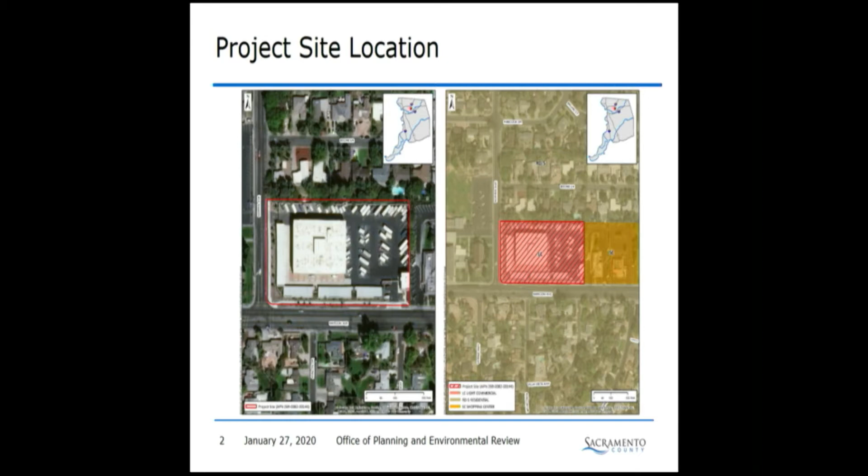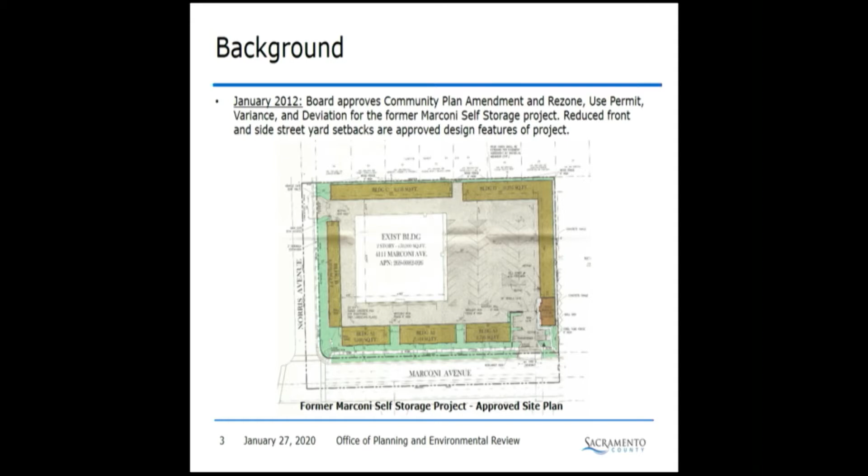These existing uses and structures on the project site were permitted with entitlements approved by the board in January of 2012 for the former Marconi self-storage project, which included a community plan amendment and rezone of the project site from business professional to light commercial, a use permit to allow a self-storage facility and RV boat storage on the project site, a variance for a reduced rear yard setback, and to eliminate required landscaping and screen trees along the northern property line adjacent to residential uses, and a deviation from fencing requirements along the northern property line. Reduced front yard and side street yard setbacks are identified as approved design features for the project.

With the exception of the 2 structures located along the northern and eastern perimeter of the project site, labeled buildings C and D in the depicted site plan, project structures and site improvements were constructed and the facility was operational by 2013. Although the deviation from the fencing requirement along the northern property line was granted, that wall was eventually constructed. It's an 8-foot tall wall, and the reason it was constructed was because those structures in those areas were never constructed, so the wall was put in instead.

The applicant has indicated that there is additional demand for enclosed storage space at this business location, and to that end, the applicant proposes to remove the outdoor storage of boats and RVs from the site in order to expand mini storage use. As such, the following entitlements are being requested: a use permit to allow the expansion of mini storage by way of 4 new structures, adding approximately 33,000 square feet of additional area, and the removal of outdoor boats and RV storage from the site, a special development permit.

A special development permit to allow for a reduction in required vehicular and bicycle parking spaces, and design review to comply with the countywide design guidelines.

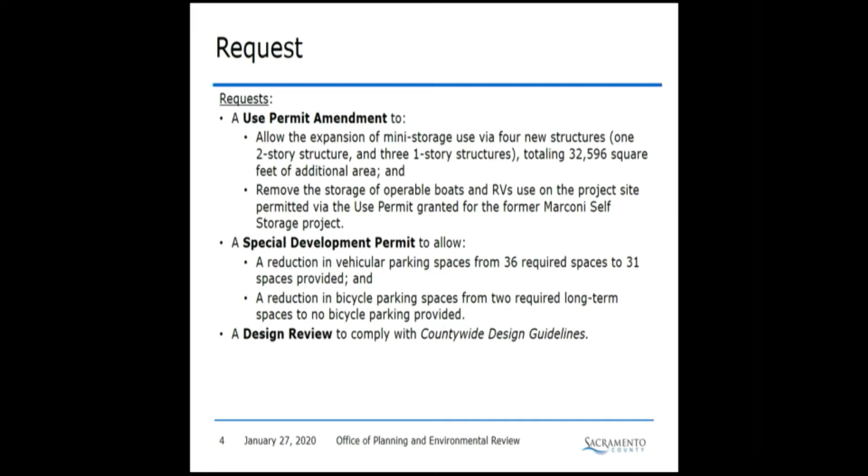The removal of areas currently used as boat and RV storage would allow for 3 new one-story structures, approximately 10 feet tall, located along the northern and eastern perimeters of the project site, as well as a new 2-story structure, approximately 22 feet tall, located in the eastern portion of the site.

The 1-story structures are the typical roll-up storage units, and the 2-story structures have primary points of access to access the storage units inside the building.

A total of 31 parking spaces would be provided in the vicinity of the 2-story structures and the primary driveway from Marconi Avenue. Our zoning code doesn't specifically identify parking requirements associated with this use. As such, the parking ratio of 1 space for every 2,000 square feet for warehousing uses is applied, which is the most similar type of use to mini storage.

Staff applied this required parking ratio to the square footage of only the 2-story structures, as it is anticipated that patrons of the 1-story roll-up structures would not be utilizing marked parking spaces and would drive up to load and unload their stuff.

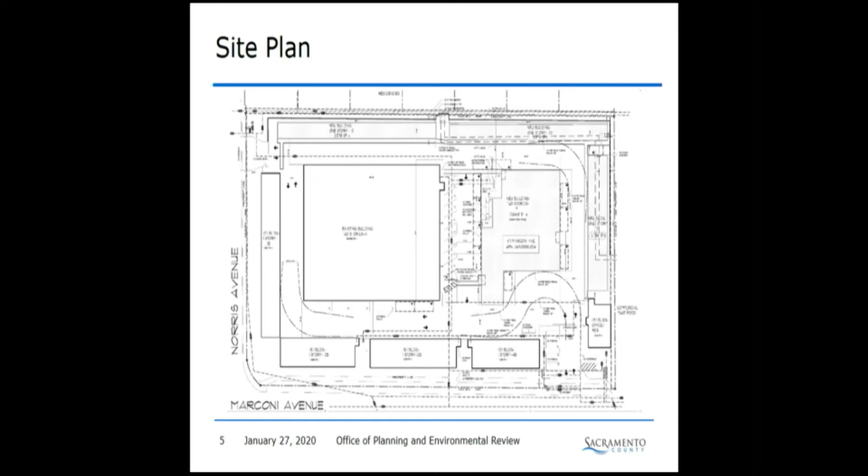With this application, 36 vehicular parking spaces are required for the project, and a reduction of 5 parking spaces is what is being requested in the special development permit. No changes are proposed to the existing structures, walls, fencing, driveways, landscaping, or signage on the subject parcel.

The proposed structures are designed to match and complement the existing structures on site through use of similar color and accents. The new 1-story structures would be painted beige.

Views of these structures would generally be screened by existing on-site structures, as well as the wall and fencing along the project site perimeter. The new 2-story structure would also be painted beige and include brick siding and beige aluminum canopies to match the existing 2-story structures and the office and manager's residence.

This structure would be visible from Marconi and from existing commercial uses and residential uses to the north and east.

The Design Review Committee, when reviewing this project, suggested that the brick siding on the south elevation of the 2-story structure wrap around the southeast and southwest corners to better facilitate cohesiveness with the existing structures on site, and this suggestion has been incorporated into the west and east elevations of the 2-story structure.

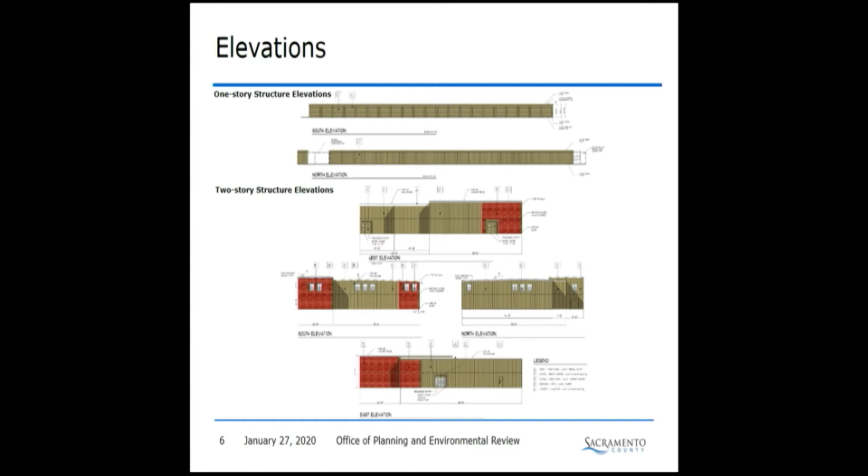The final hearing body for this project is the Planning Commission.

Substantive public comments received on this project include 1 inquiry from a neighbor that resides in a residence abutting the project site to the north. He asked for clarification regarding the height of the existing wall and the proposed 1-story structures, but no specific comments were made pertaining to this project.

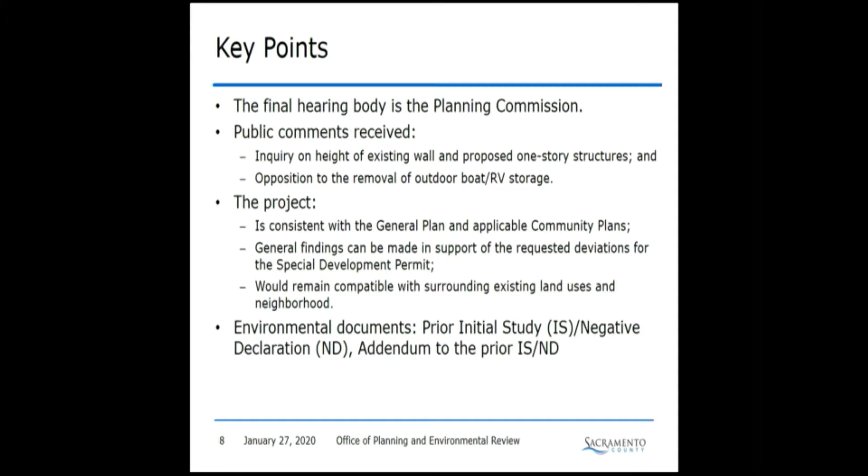2 other members of the public expressed opposition to the project due to the request to remove outdoor boat and RV storage uses from the site. These commenters currently store their vehicles on site and express that eliminating this use from the site would require them to park their vehicles on public streets, which would potentially increase vandalism, theft, and blight in their neighborhood.

Staff received a call this morning from a person who is unable to attend this meeting but wanted staff to reiterate her concerns regarding the unintended consequences of removing outdoor boat storage from the site and how this will drive prices to increase due to the reduction in competition.

The project is consistent with the general plan and applicable community plans. General findings can be made in support of the requested deviation. This site has been used for this use since 2013, and the project improvements would remain compatible with the surrounding existing land uses.

The environmental coordinator determined that the prior environmental document prepared for the former Marconi self-storage project remains applicable to the current project proposal and identified no potential significant impacts as a result of the project. There are no mitigation measures, and an addendum was prepared to the prior IS/ND.

Both DRAC and the CPAC recommended approval of the project, and so staff is also recommending approval of the project and that the Planning Commission take the following actions.

Staff is happy to answer any questions, and the applicant team is also available for questions.

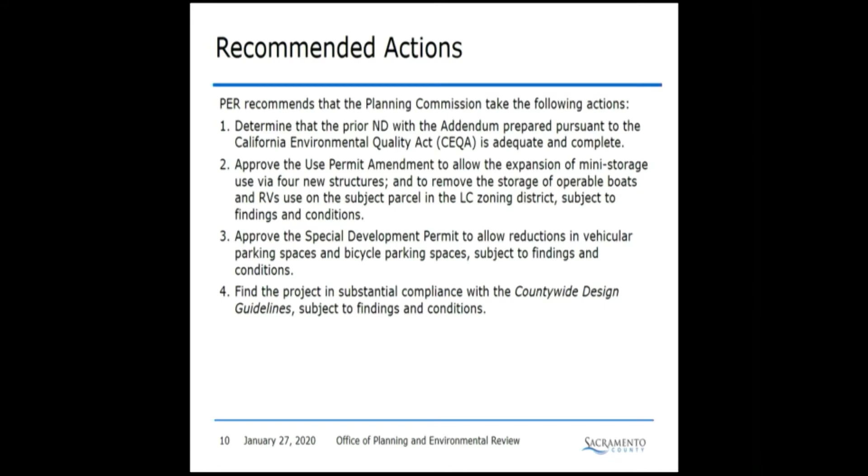Great, thank you. Any questions of staff? Just one. Good evening, Jesse.

Just one question. Hours of operation? Those are in the prior use permit. Can I just grab it so I can tell you? Yeah, that's great. I'm just curious what it was. I didn't notice it.

So it does say 7 a.m. to 9 p.m. Okay, that's good, Chris. Thank you, that's good.

Thanks, Jesse. Any other questions, staff? Okay, thank you. We'll bring the applicant up.

Good evening, Norm Kotash, and yes, I've been sworn in. And you're in agreement with all of the conditions? I am, we are. Any questions of the applicant? Okay, thanks so much, thanks for your time.

Appreciate it. I do not see any public comment. Anybody wishing to speak on this item?

Okay, Madam Chair, I did think of a question for staff. Sure, go ahead. Just real quickly, do I understand that even if the applicant had not requested this change, they could choose not to provide boat or RV parking, that there's no condition that requires them to continue doing that, right? So the zoning code in effect at the time when the prior use permit was granted required a use permit

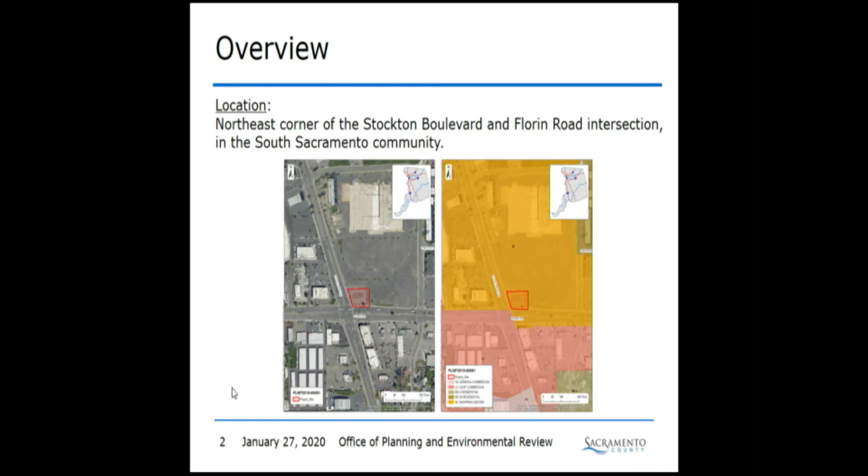So the request before you today is for a use permit, special development permit, and design review. The use permit entitlement is to allow a 24-hour automobile service station and a 24-hour convenience store within the shopping center zone, as well as a taller fuel station roof structure above the design clearance height. The special development permit is requested to allow deviations from public street frontage, setbacks, landscaping, and signage development standards.

And as you will see in the next couple of slides, there are two versions of the site plan and the landscape plans - an interim and an ultimate plan. The interim reflects the build-out of public improvements within existing conditions, and the ultimate reflects the build-out of the entire corridor, which includes intersection widening and dedication of right-of-way.

So two of the requested landscape deviations, the 20% landscape area and the 8-foot wide landscape planter, are a direct result of the future corridor and intersection improvements. I'll go into that more in detail later on when the site plans are up on the screen. The request also includes a design review to comply with countywide design guidelines, and a letter of public convenience or necessity will be heard by the board and is part of this development proposal.

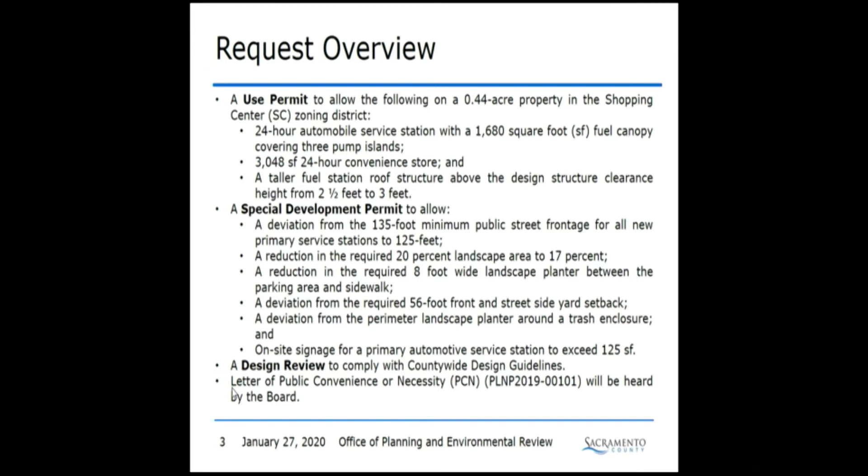So as I said, there are two versions of the site plan. The interim plan is on the left, and it reflects the build out of public improvements within the existing conditions, reconstructing the sidewalks and driveways in kind to meet ADA accessibility. The ultimate plan on the right reflects the build out of the entire corridor and intersection. Both Stockton Boulevard and Florin Road are planned to be 96-foot wide thoroughfares, and the intersection is to be widened.

Approximately 166 square feet of the subject parcel would be dedicated to the ultimate build out of the surrounding roadway network. The site plans were designed to accommodate both interim improvements and ultimate improvements.

The automobile service station is proposed to consist of a 1,680 square foot fuel canopy covering 3 pump islands, and the convenience store is proposed to be 3,048 square feet. The fuel canopy is located in the eastern portion of the subject parcel, with the convenience store in the western portion, and the drive aisle and parking area between them. There would be 2 entrances to the convenience store, one facing Stockton Boulevard and one facing the parking area.

As part of the special development permit, deviations are being requested for reduction in structure setbacks due to the size constraints of the site, and to create a more forward building presence on the intersection corridor.

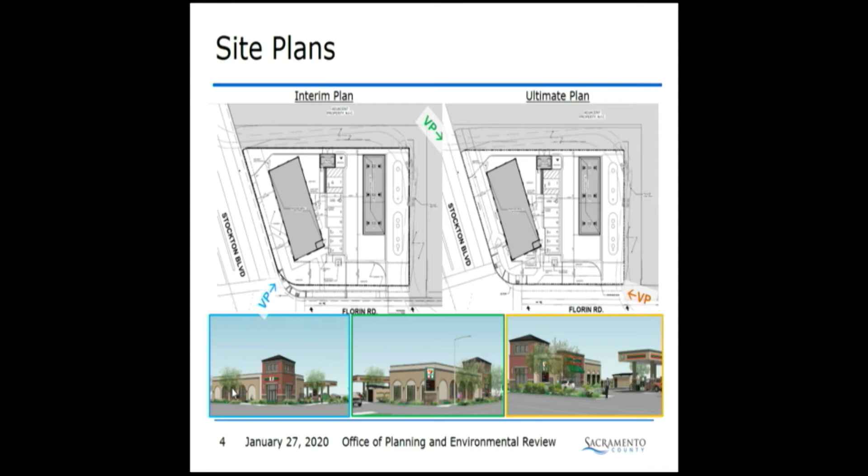Here are the 2 landscape plans. The interim plan shows approximately 75% of the subject parcel consisting of the footprints of the proposed new structures and paved areas, with 25% landscaped. This exceeds the zoning code's minimum 20% landscape area requirement.

The ultimate plan shows approximately 83% of the subject parcel consisting of impermeable surfaces, and approximately 17% landscaped. The increase in impermeable surfacing is a direct result of the ultimate build out of the Stockton Boulevard and Florin Road intersection right-of-way. So the applicant is requesting a deviation from the 20% landscape requirement.

In addition to granting the county right-of-way, a 23-foot easement for public utilities and public facilities on both Stockton Boulevard and Florin Road would be required. This creates, as you can see, an alternative pedestrian layout and landscaping within the county right-of-way.

The interim plan would consist of an attached sidewalk along the subject parcel's interface with the two roads, while the ultimate plan would feature a separated sidewalk with landscaping on either side. The ultimate plan also includes more trees along the subject parcel. No trees along the roadway were included in the interim plan because that area will change in the future.

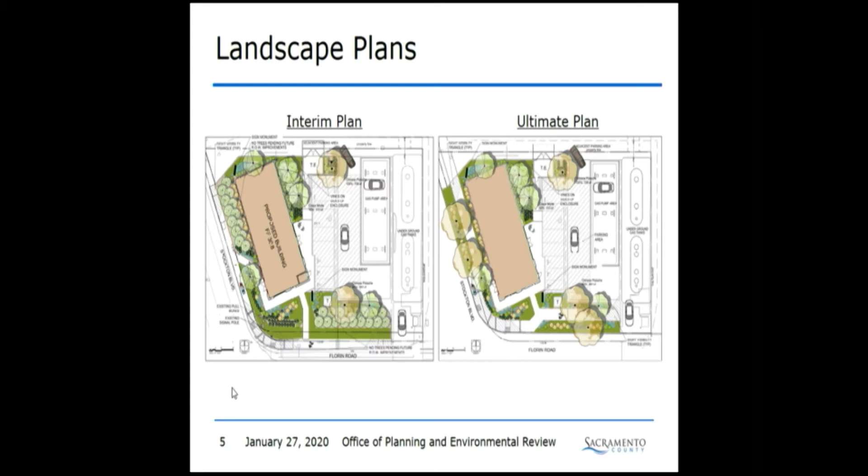In order to capture the orderly development of both of these plans, conditions of approval were crafted to ensure that final development plans are in substantial compliance with the approved exhibits at the time of project development and at the time of the intersection widening and full corridor build-out. That's conditions of approval 3 and 10.

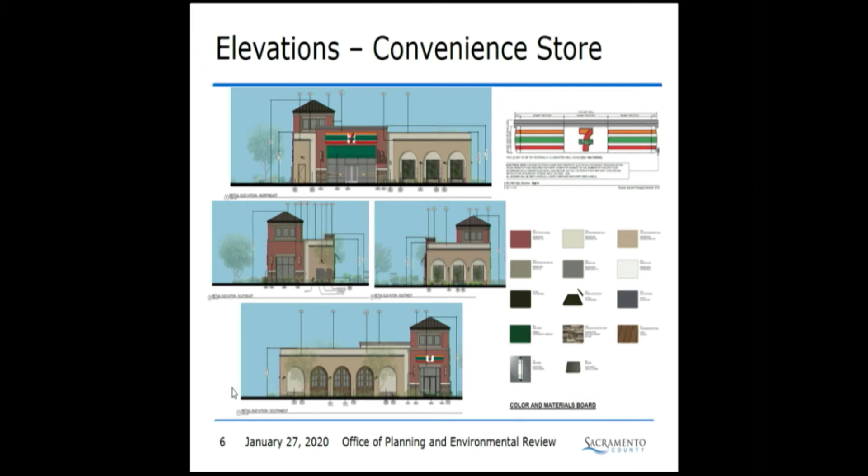All proposed structures on the subject parcel would utilize a color palette consisting of dark and light beiges with red and gray accents. A stone base would be featured on the red accent portions of the building, and architectural archways would be featured along 3 of the elevations, containing either windows with wood paneling or some climbing vegetation.

Signage on the subject parcel consists of wall signs on new structures, 2 monument signs, and corporate logos and advertising on the fuel dispensers on the pump island area. The applicant is requesting a deviation from the 125 square foot maximum sign area standard to accommodate the logos on the fuel dispensers. The monument signs and fuel canopy would contain the same stone base as the convenience store for aesthetic consistency, and the trash enclosure would be painted and architecturally similar to the main building.

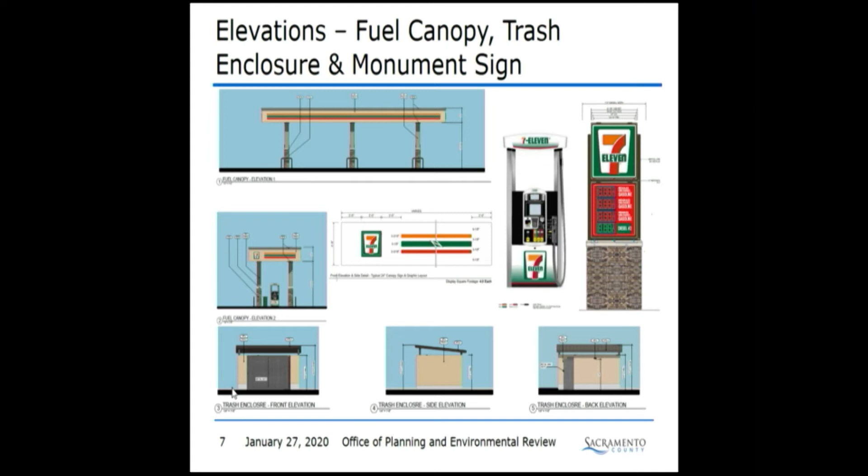An initial study and negative declaration was prepared pursuant to the California Environmental Quality Act. It was released for public review on September 27th of last year, and the public review comment period closed on October 27th, with no comments received during that period. The initial study and negative declaration concluded the project would have no impact or less than significant impacts to environmental resource topics. However, impacts regarding hazards and hazardous materials, cultural resources, and air quality and greenhouse gas emissions were discussed, with mitigation measures to enforce mitigation implementation, notification, and verification of all actions.

The South Sacramento CPAC, the Community Planning Advisory Council, met on September 18th of last year to hear and consider the project, as well as review and comment on the general plan amendment to the environmental justice element. Seven members of the public spoke on the proposed project; five were members of the county's Environmental Justice Advisory Committee and other community-based organizations, and they were all in opposition. Reasons for opposition included overconcentration of convenience stores in the area, air quality impacts from gas stations, lack of healthy food options, traffic safety and impacts, proposed on-site security, and potential crime.

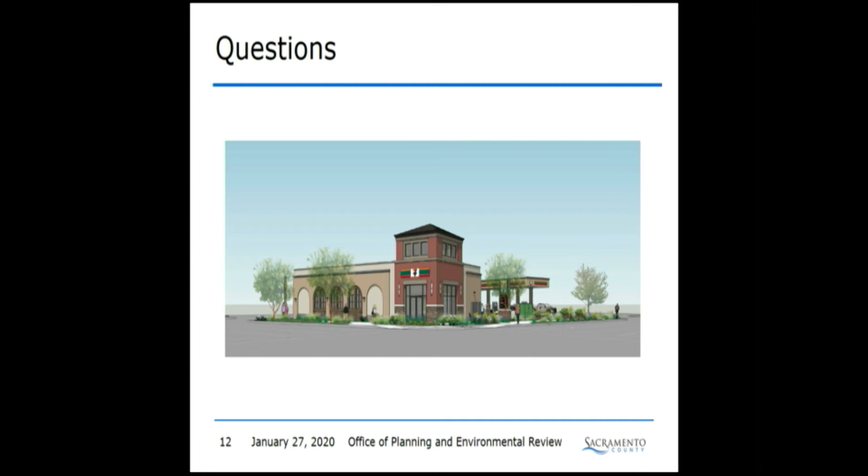Good evening, Kimber. A couple of questions for you regarding site access. Did the applicant give you a diagram depicting how the fuel truck is going to be completely encapsulated on site without parking in the easement? No, but I believe they brought some here today.

I'm not sure what condition the easement is in. Is there any requirement on improving the easement so it's not full of potholes or items like that? That's completely within the easement agreement itself, so it would be a civil matter between the two parties on who maintains it.

It's a very old easement, so it's hard to read, but I think it was included in the current... We'll have an opportunity for the applicant to speak, so we'll get to you in just a second. It doesn't state who would be maintaining it. It just says it is an ingress and egress easement of persons and motor vehicles over and across that certain parcel of real property described as follows. So there isn't specific language on who would be maintaining it.

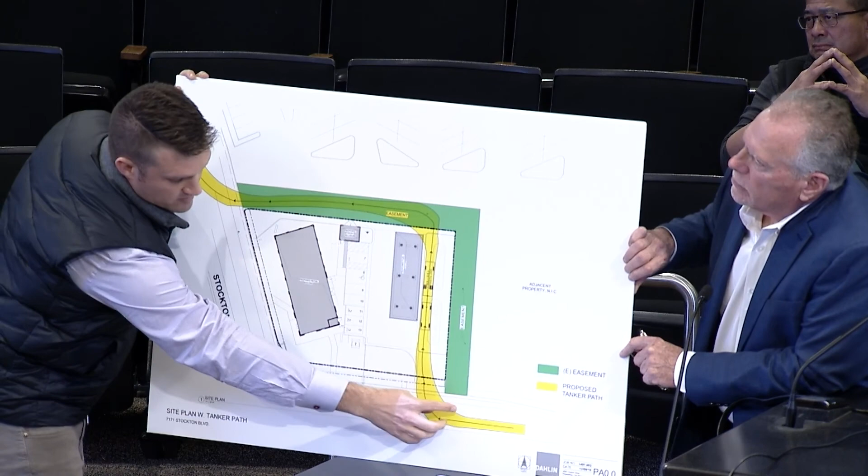We get closure, so we have a full, complete parcel. If there was a gap or something like that, it wouldn't close - you'd have two separate parcels instead of one, if that makes sense. One developable area, but we would not be proposing to park anything in the easement. It would turn in, come here to fuel, turn out. This is inside, and here's the tanker, how it would work. So the offloading of the fuel products will take place on the actual property, not in the easement. The easement is just access.

Then let me ask a question relative to the graphic you're presenting. During business hours, the fuel truck comes in, parks as you depicted. Now doesn't that render your fuel island somewhat inoperable during that time period? No, I would say one side would probably be blocked. You're 100% right, but I think they can still get in and out, if that makes sense, so they can get around. But I think operations from 7-Eleven can speak a little more to the timing of fueling, when it comes, how long it takes.

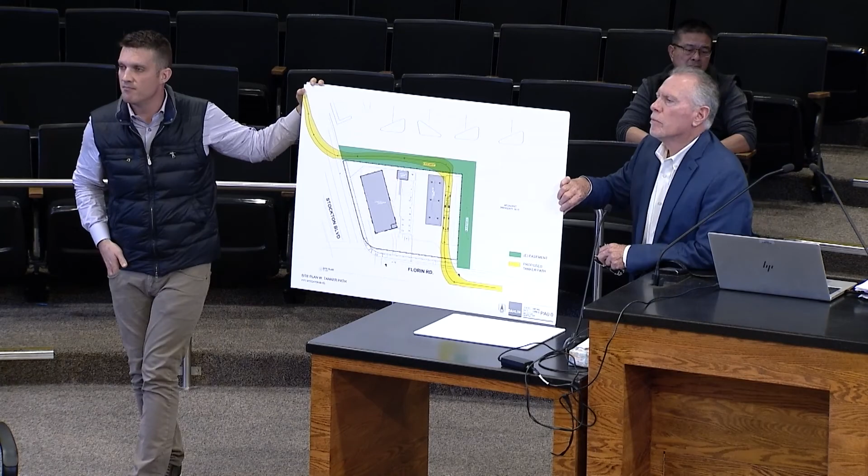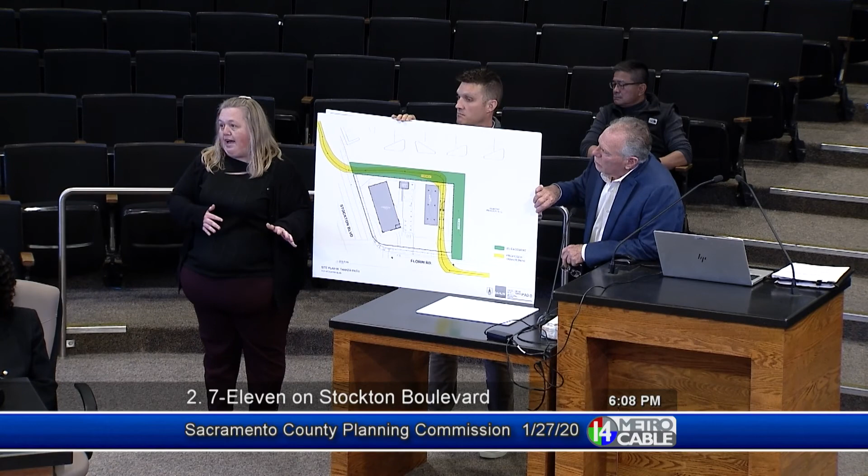Crystal Justice, 7-Eleven. So we go through and create all of these drawings and have them approved through our fueling department. We own the actual company that delivers the fuel, so they have to follow these drawings. A lot of times there's no other way they can get in and out of our property line, so we have the same drivers that do these routes every week in and out.

So as you can see, they would come in and move around. The approximate time they're in our property line is about 20 minutes, give or take. It may be a little longer if they have to wait for a car to move, since they're not going to block a car if something's parked there. But they're very efficient at getting in and out and dropping that fuel.

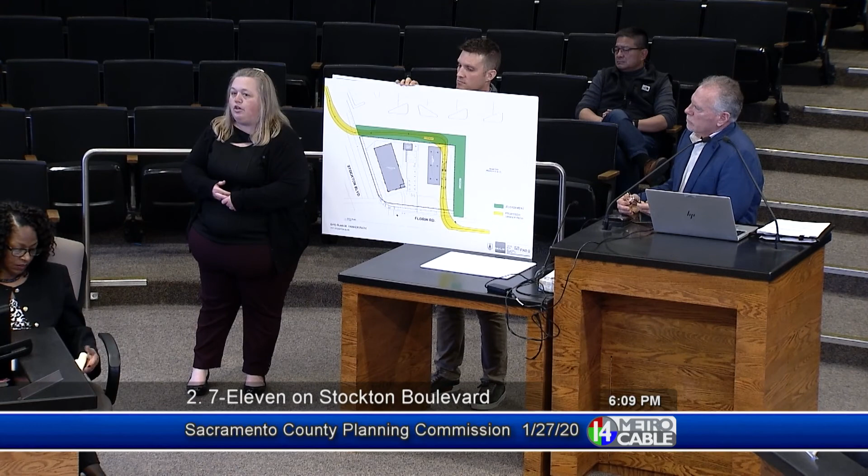What time of day do they normally arrive? We arrange it typically 7 a.m. to 6 p.m., but we can move that around and make recommendations based upon travel patterns and busy times of day. In a more urban area, we try not to do that during rush hour traffic. Our transportation department has traffic studies they look at for those types of things too.

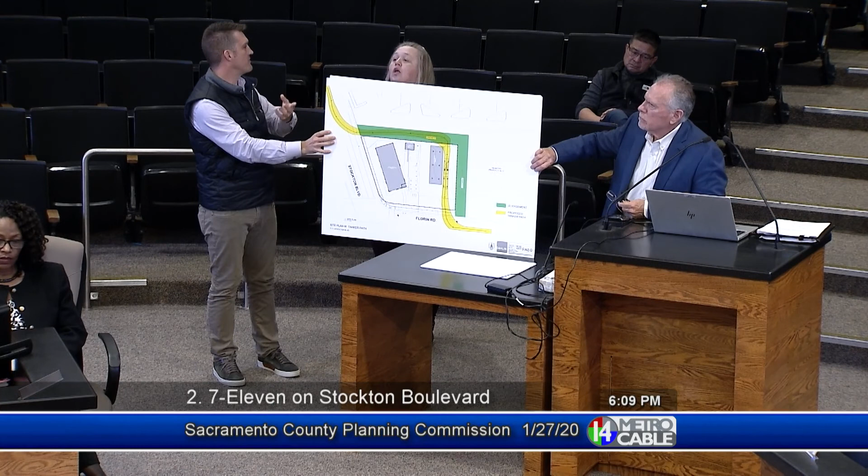If I'm understanding correctly, what we're saying is that there's no way to physically prevent them from ever parking in the easement, but they have protocols in place that say this is your truck path, this is how you fuel. It sounds like those protocols and that path are a big part of the job of driving the trucks. Yes, so I think they're doing everything they can to promote adherence to the plan.

After they offload the product into the tank, is there any reason for them to park on the property? Don't they move on to the next one? No, they go in, drop off the fuel paperwork, and then move on to the next location. They're not shopping or staying around or parking there. If they need a restroom break, they go to specific locations on their route identified for that purpose.

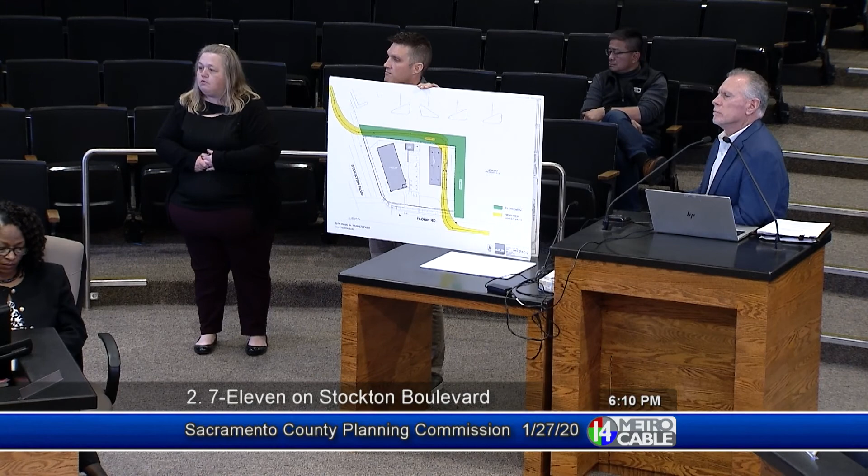If I can expand one more question: would you be opposed to adding a condition of approval using this graphic, stating that all fuel offloading be completely on-site as per the graphic? I'm fine with that. One more thing - you can tell your truck driver not to violate our protocols and conditions of approval. That might be appreciated by the adjacent owner too. Okay, thank you.

Any other questions? Great, thank you very much. I do not see anybody signed up for public comment. Is there anybody here that wishes to speak on this item? Okay.

Comments, thoughts, motions? I'll make a motion to go with staff recommendations with the added condition of limiting the fuel delivery to be on-site as per the graphic, if you can supply it to staff as a condition of approval.

Give it an exhibit number or some kind of designation, whatever the gentleman held up - Exhibit A. I don't know if staff has a copy of it, so maybe we could leave it as part of the evidence now for the clerk to keep, or at least have some facsimile of it. We can send the same thing to Kimber or email to you all. I think an email would be appropriate, and then you can confirm it's the same.